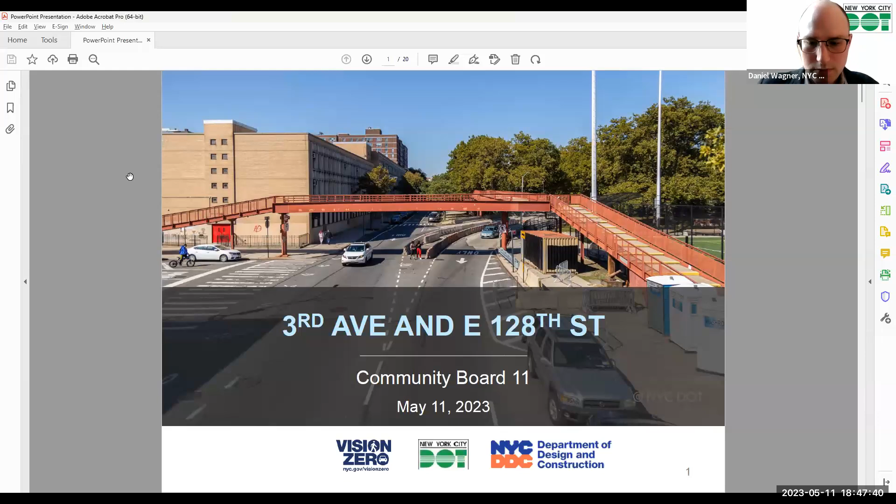So I'm here to talk to you about 3rd Avenue and 128th Street. This is a location I hope you're all familiar with. Just to give you some quick background, so we're all talking about the same thing.

We are located at the edge of the 3rd Avenue Bridge off-ramp. There is a park to the northeast of the intersection of 128th and 3rd. There are also a handful of schools: PS 30, Hernandez Hughes, PS 138, Harlem Success Academy, The King's Academy. As DOT was scoping this proposal and trying to figure out what it would actually be, we met with those schools in late 2019 to hear how they use the intersection, the bridge, and the park. So we did some preliminary outreach with them, and I want to make that clear.

We also have a bus that comes down across the bridge, runs east on 128th Street, turns right on 2nd Avenue, then turns right again on 125th Street. We also have an eastbound bike lane, a Class 2 bike lane that goes east on 128th Street. It's not on the curb, but on the north side of 128th Street west of 3rd Avenue, and it switches to the south side east of 3rd Avenue.

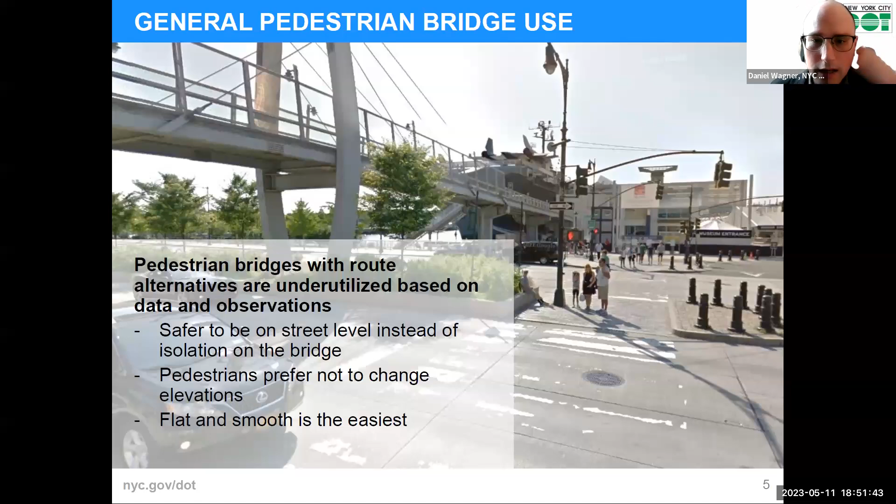This bridge at 128th and 3rd is a pedestrian bridge. This one you see on screen is actually at 46th Street and 12th Avenue at the Intrepid Museum. When you have a bridge that parallels an actual on-street crossing, look at how many pedestrians use the bridge versus how many use the street. I think it's very clear what tends to happen - pedestrians prefer not to change elevations. They prefer not to go up, even though it's technically safer. Flat and smooth is their preference.

An example from a different district, CB12 in Inwood, at PS5: there's a pedestrian bridge that exists, and a crosswalk that also exists. We took data on the users - you can see it on screen. The columns on the right, blue and orange, are pedestrians using the crosswalk. The columns to the left are pedestrians, adults or students, using the bridge. You can see the difference in who's using it. This is statistical evidence of what I was just saying - when given the option, pedestrians stay at the level they're already at.

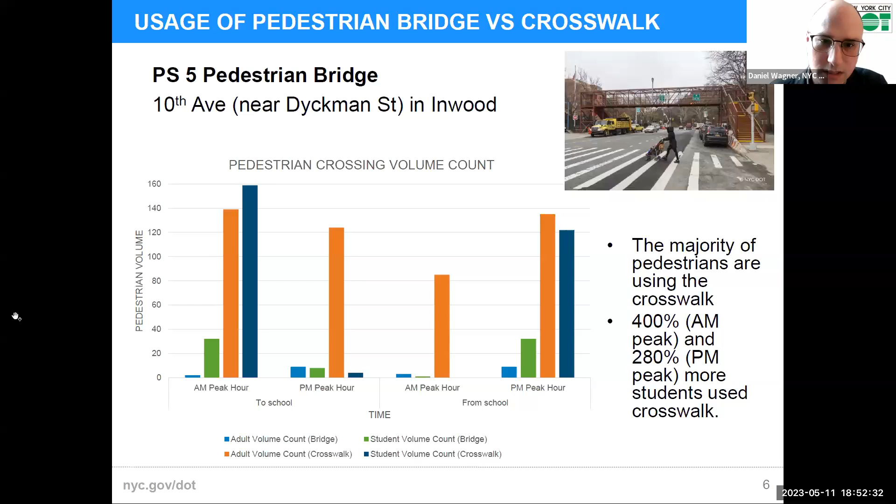The purpose of a bridge, if you think about it, is like trying to cross a river you can't cross, so you'd have to go miles out of your way. The purpose of a bridge is to shorten the crossing. This bridge, the one at 128th and 3rd, actually lengthens the distance you're trying to cross.

If you're standing on the southwest corner of 128th and 3rd and want to cross to the north side, instead of crossing 53 feet highlighted in blue, you'd have to walk backwards 174 feet before getting across, and then still walk either 96 feet to the right or 246 feet to the left. So this bridge is counterintuitive to the purpose of a bridge.

Additionally, the bridge itself is not even ADA compliant. It was built long before we had ADA, so that's another challenging issue for it. You can see in the picture on the left, these are pedestrians just crossing the street - they're not using the bridge.

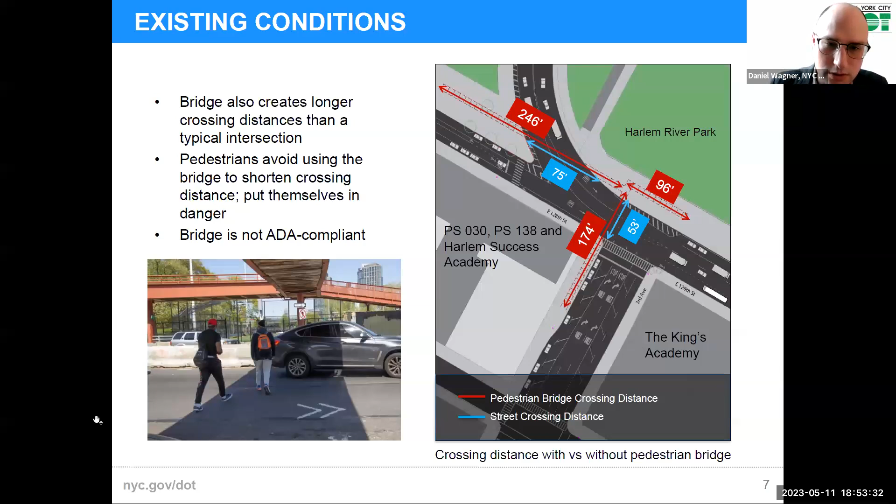We also have some safety statistics, and the fact that there is data, if it's not all zeros like I would have hoped, is evidence that people are crossing at street level rather than using the bridge.

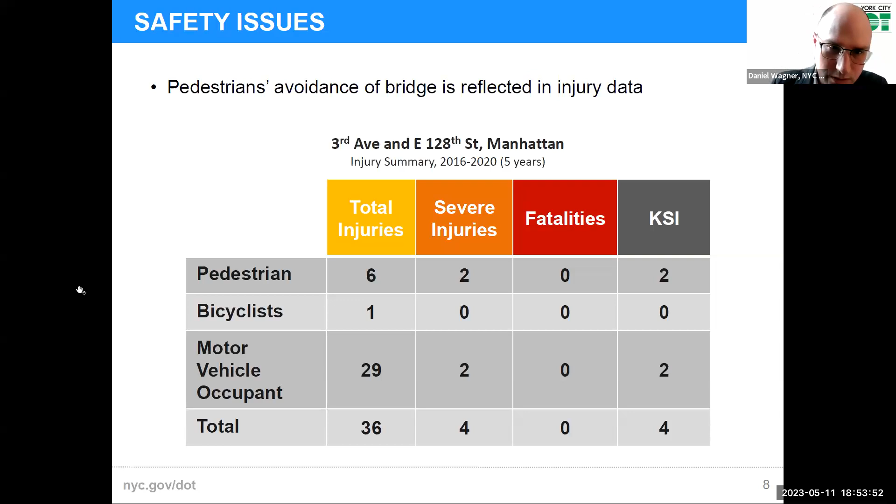I know y'all weren't here to listen to me talk about existing conditions - you want to know what the proposal is. On the left is the existing conditions for reference, on the right is the proposal. That's the whole graphic, and I'll go into all the details, but just so you can compare and contrast, I'll leave it on the screen for a half sec.

So the first thing we're proposing to do is remove the bridge. It's at the end of its lifespan, so it's time for it to be removed. We're going to relocate all modes of traffic to the street level, like a normal regular street intersection. You can see the pedestrians in the lower graphic crossing at street level rather than on the bridge.

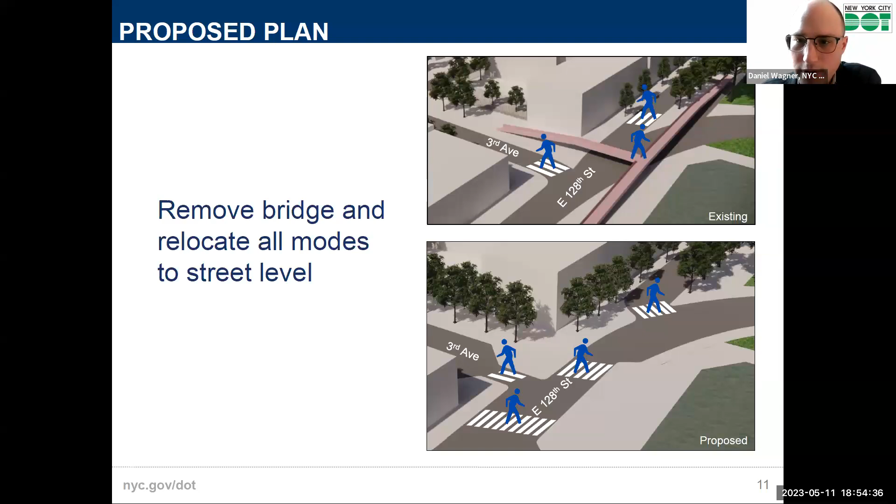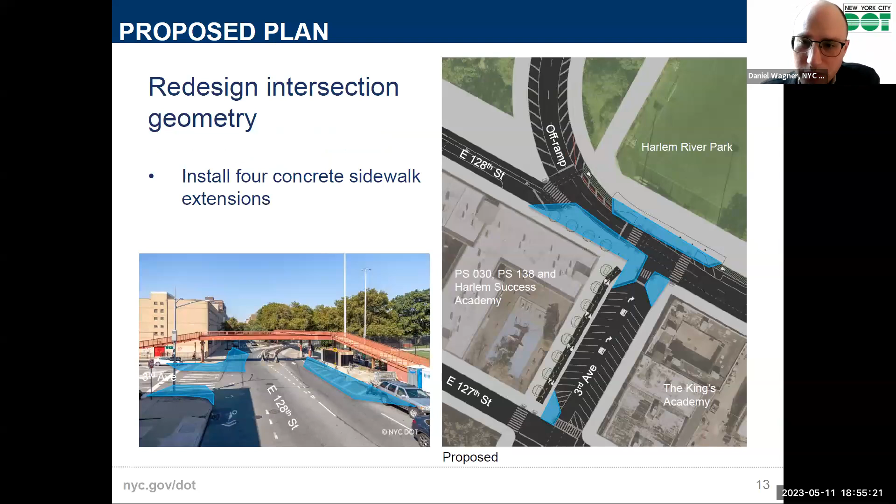Once we do that, we can build a series of concrete curb extensions. On the right is the plan, on the left is an attempted rendering. What it's going to allow is more pedestrian space, shortened crossings, all those kinds of things that I hope you're familiar with as the Transportation Committee.

I can tell you that when you, as a pedestrian, try to cross 2 lanes of traffic going in one direction, with a signal that stops all that traffic, it's fairly easy - not really big challenging. There are other examples of locations - Riverside and 95th Street is my favorite. Across there, it's very easy to do.

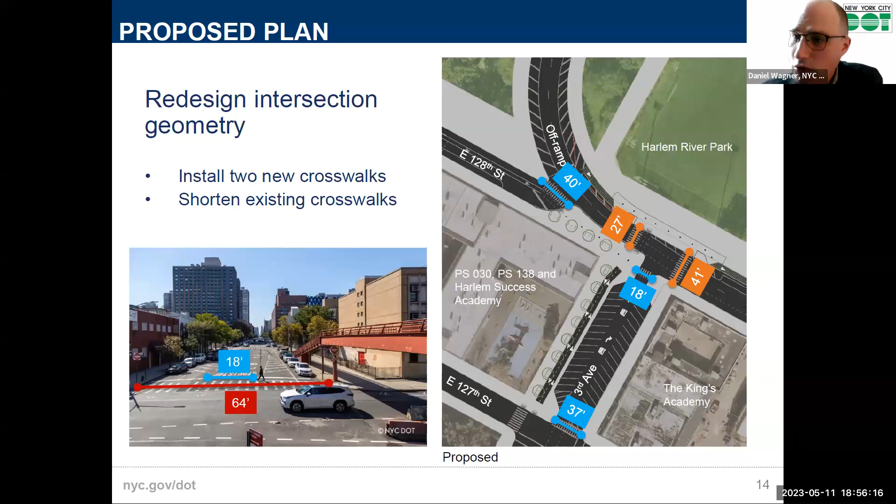Also, we are going to be doing a number of bicycle improvements at this location. These bicycle improvements are the first steps towards a larger network change that isn't really part of this project, but we know what's coming, so we're able to incorporate the necessary elements into this project. As this is a capital project, it will take a few years, so those network changes would be a few years out, but they'd come in concurrence with this project or shortly thereafter.

But let me go through them. A 2-way protected off-street bike lane on 3rd Avenue, just from 127th to 128th, because that's the scope of the project we're talking about today. That's a proposed off-street 2-way bicycle lane - basically, as a bicyclist, no conflicts with vehicles at all until you get to an intersection.

The 128th Street existing bicycle facility west of 3rd Avenue is on the north side. Part of those future proposals is to bring the bicycle facility that's east of 3rd Avenue from the south side of 128th Street to the north side, so it's consistent for a bicyclist.

You're not switching sides of the street, that's kind of difficult and causes issues. So we're proposing to keep it on the north side, and as part of this project, we would incorporate some green paint on the north side, crossing across the off ramp. I spent a lot of time trying to negotiate designs so that the bicyclist continuing on East 128th Street would go behind a pedestrian who's waiting to cross the street on the south side.

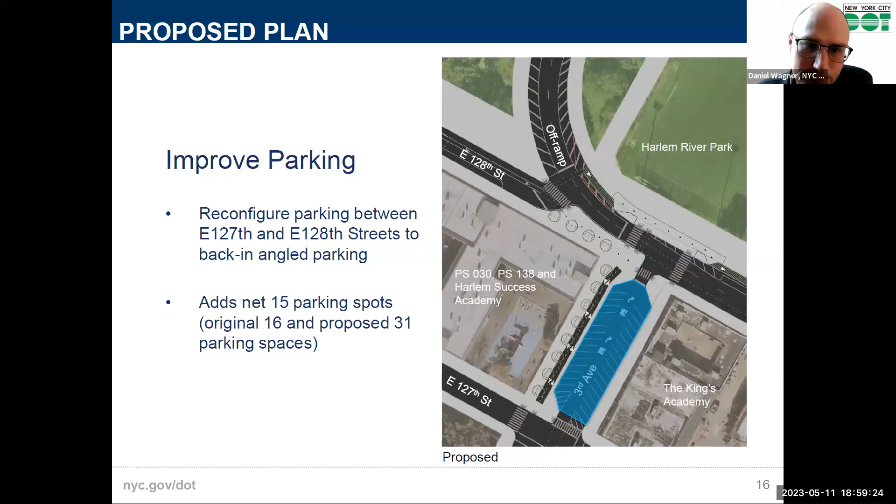It'll be back-in angled parking between 127th and 128th Streets. So overall, the plan is to remove the bridge, obviously, that's what I started with.

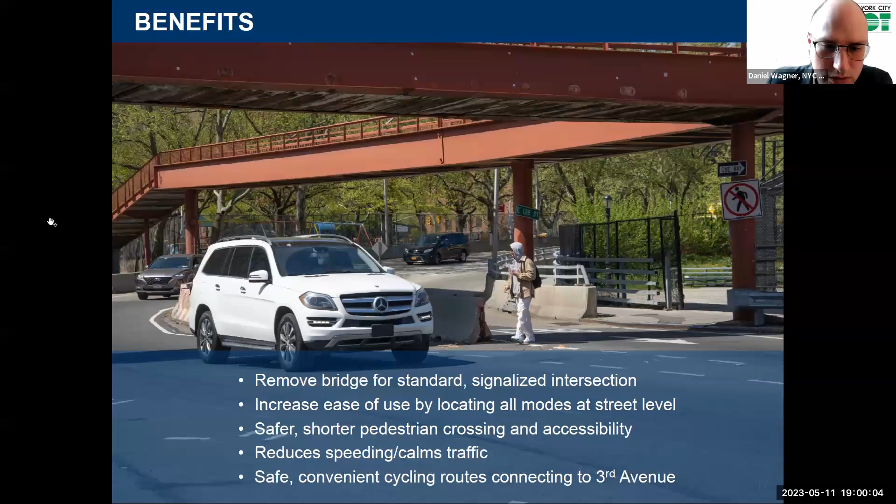Signalize the intersection. It increases ease of use by locating all modes at street level. I think New York City operates a little smoother and better when we do that. Safer, shorter pedestrian crossings, everything will be up to ADA compliance when we're done. It'll reduce speeding and calm traffic. It's kind of congested during the AM rush hour, but overnight you've got cars flying off that bridge, so all of this together should do some street calming. And it includes safe, convenient cycling routes for bicyclists.

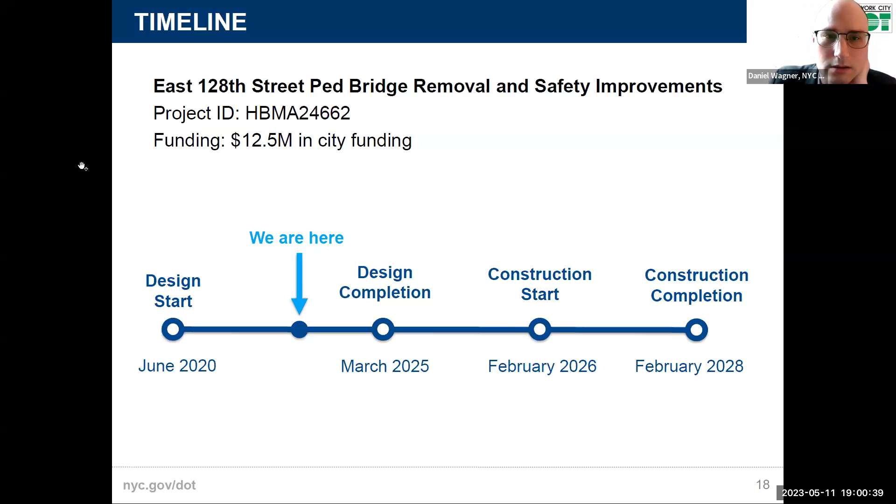So what is this project? This is a capital project, not something that DOT is going to do in-house. Here's a timeline: we started the design quite a while ago. Today is May 2023, and we expect to finish the design within 2 years, then construction would start a year later and be completed hopefully 2 years after that. So we're a few years out from this being done, but it is being utilized as city funding, and there's a project ID if you need it.

And that is the proposal. I am happy to take questions. I will lean on the board to navigate and host the questions, I guess.

Thank you. Good. All right, Charlie, do you have a question? Yeah, I have a question.

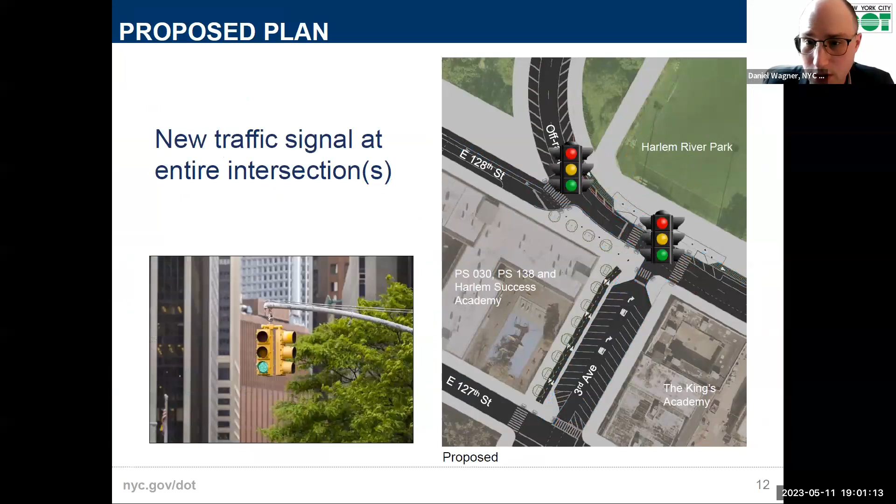You talked about shouldering the streets and everything. What's happening with the sanitation truck? You have not mentioned anything about the sanitation truck, and they're right in that block, and they use those highways to bring their vehicles. Yeah, they can navigate everything. There should be no issues. The sanitation trucks can come off the ramp, they can come down East 128th Street, and they can navigate through the intersection without a problem.

All of the geometries of the curb extensions were designed with the street sweeper in mind, so they can clean. The snow removal shouldn't be a problem.

I'm not sure what your concerns are, but... Yeah, the concern is coming off the bridge with the trucks, because some of them do come to 128th Street, and some come through the bridge. So you're accommodating 128th Street, but you're not mentioning that those trucks do come on the highway to go into 128. They come off the off ramp from Third Avenue, correct?

Yeah, so when they come around, the design of the project is to make it easier for them to navigate through the space, but it will not encourage them to speed or go too fast, anything like that. So there should be no issues, that's what I'm trying to say. It should work out. All right.

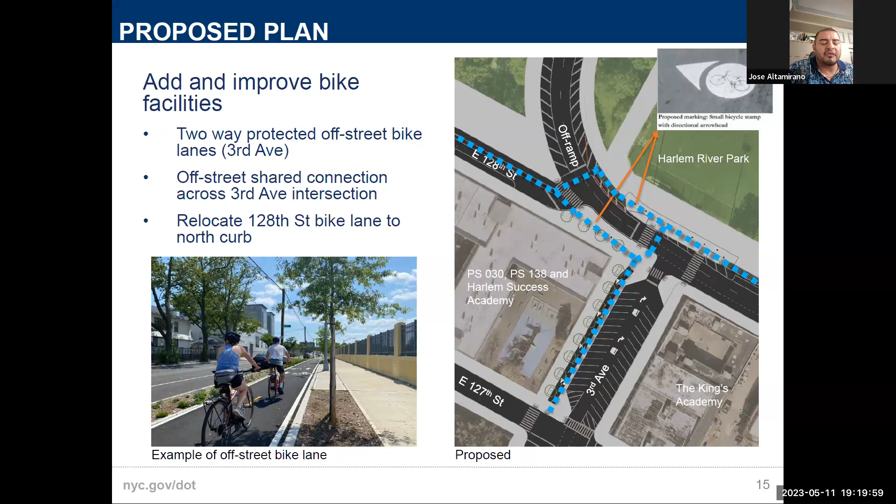Obviously helping to improve it is important, but I have significant concerns about the amount of traffic currently there, and the traffic that will be caused by these changes will be astronomical. Anyone that drives into Manhattan drives through that bridge. The majority of people do not go to Lexington, they come this way. If you're going to Harlem River Drive North, you have to go this way and take it a little further after the turn. So it is concerning.

I understand the bridge is an issue, but as we continue these dialogues, I am happy DOT has been able to come to us so early in the process for our input. But the traffic there is horrendous, even not just in the mornings, it could be the middle of the day. There's a huge divider currently there that stops a lot of slowdowns, so now with a traffic signal there, I'm not sure what that would look like.

I was actually hoping DOT would do something more drastic and turn 3rd Avenue into a two-way street from 127th to 128th, because a lot of people drive up 3rd Avenue and cut into 128th.

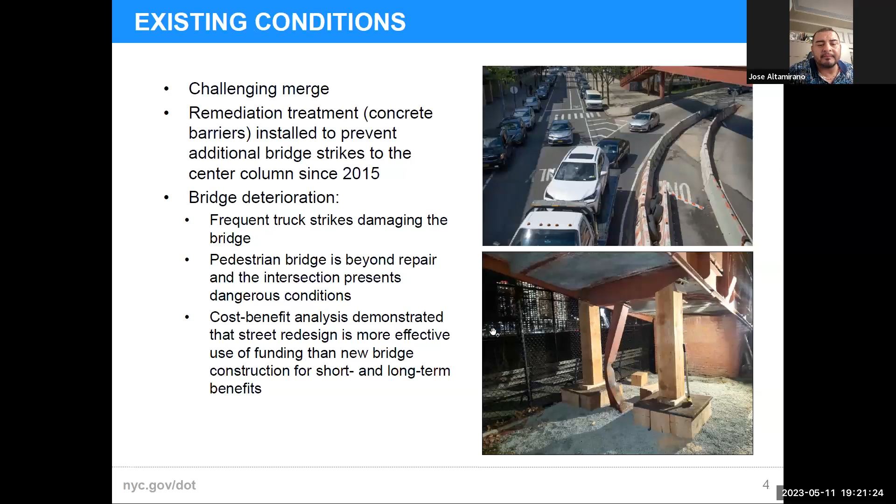Could you pull up the map? Which one, to the left or right? This one doesn't really help. Maybe go more to the right, like the new improvements shown side by side. This one? This will work.

So you see, a lot of people, because there's so much traffic, will drive against traffic from 128th to 127th. It definitely alleviates things, because most of the traffic is that little turn. It isn't just the traffic that comes off of this bridge. Everyone that gets off the Harlem River Drive going south and exits also meets at that park, Crack is Whack Park, so everyone just bottlenecks there.

The traffic is substantial. I know we're still in the process, but I was hoping they would at least consider it, because we've had these conversations before, and I've seen it in several parts of the city where they have these situations and they'll do a one-block two-way street just to help alleviate this kind of transit. So I would like to address that.

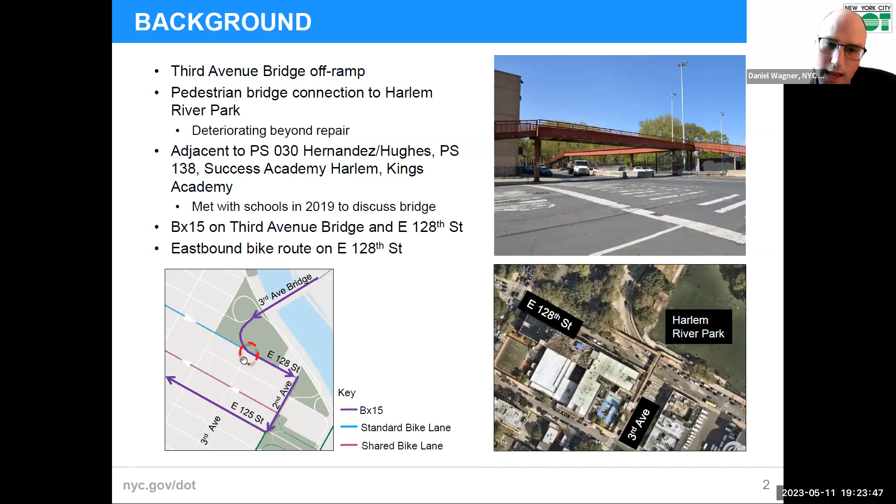We did take a look at the congestion you're talking about, and we're aware of what people are doing on 3rd Avenue, but the problem is if they're not going to Lexington — 127th Street is two-way at this location, both blocks go. It is two-way, but if you go up 3rd Avenue and make a right on 127th, it is a one-way street making a right.

So I misspoke when I said 2-way. It is a double away, so both blocks go away from 3rd Avenue. Correct.

What that means is that anybody who's sneaking down 3rd Avenue, doing something illegal, which I think is wrong and they should not be doing. I think that it is dangerous for the pedestrians, for the schools that are there. But they're doing it because there's so much extra space. So part of this proposal is to discourage that illegal behavior.

But basically what I was trying to get at is somebody who does come down here, all they can do is go to the right. Sorry, they can turn left, which would be eastbound on this drawing, and they can go to Second Avenue, which goes southbound. So they're all going to the same place.

What we're proposing with the signals is that the problem isn't this intersection. If there's a congestion problem, it's Second Avenue. And that is a larger scope for a different unit - the real problem is that there's too many people driving. Get off the streets if you really want to get rid of traffic. But this proposal should not delay traffic any more than it is today, and it's not about alleviating the citywide traffic congestion challenges.

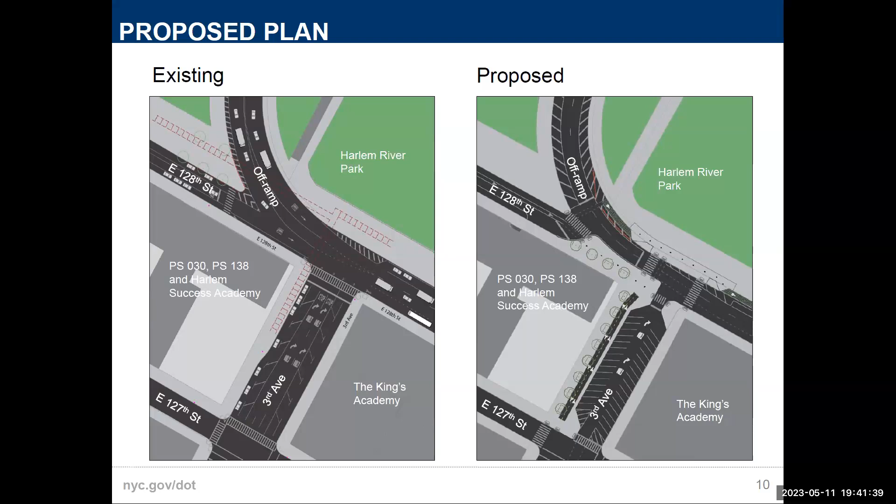Sage? Looks to be the last of our questions. So Daniel, I'm hoping that we can continue our dialogue. We definitely feel that we continue to focus on public safety and make sure that things are streamlined, that come with innovation and things that just are common sense, not just focused on agendas, things of that perspective.

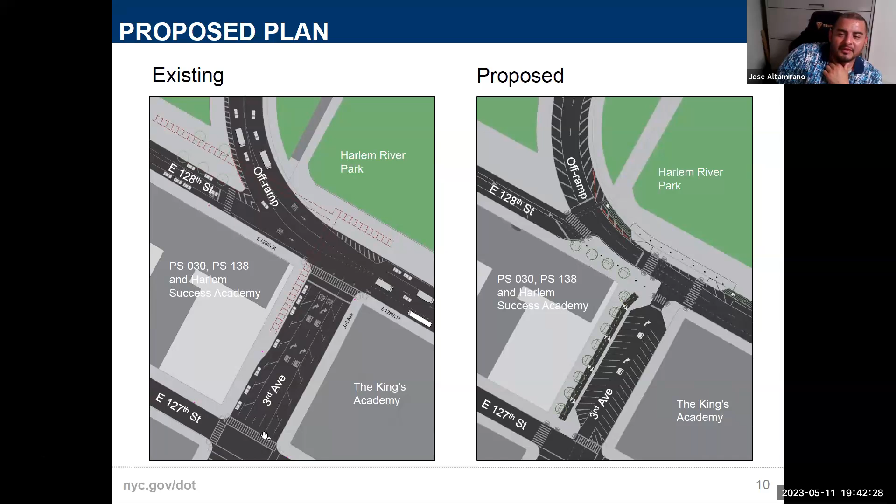And while I have you here, I actually wanted to ask you where we were with 117th Street and the barriers that we were promised. If you had any update, I know you were there with us on that cold morning, and I appreciate that. But I do want to know, because there's still a concern of ours. There's still vehicles parking there, and at this point, I've gotten tired of sending Rafael constant pictures of the sort, and I know he told us that we were somewhere in the process, but we would prefer to be more along in the process, or at least to know what we're expecting or when to expect these things.

Right. So I don't have answers that you are hoping I would have for that. I have information though. Essentially, what we're trying to do is find something that meets your concerns and our concerns, like meets in the middle. Your concerns are that we want to stop people from driving in the space, and we totally agree with that. Our concerns are that the tool that we talked about, that was the granite block. We took a look at what our granite blocks look like. We took a look at what the space looks like, and our concern basically became that the granite block was going to be too bulky for the space. We learned that by doing the project and staring at it and measuring how big most of our granite blocks are. And we were very concerned with the lack of space that was left over. So that's where we are.

So what we're trying to do is find something that meets in between those two things. Unfortunately, the agency doesn't have the magical tool that we could put down there. So what we're trying to do is pilot a number of different tools. The thing is that anytime we try to do something that we don't just have in stock, it becomes challenging and time consuming to do things like contracts or procurements or other kind of governmental words that are just a lot.